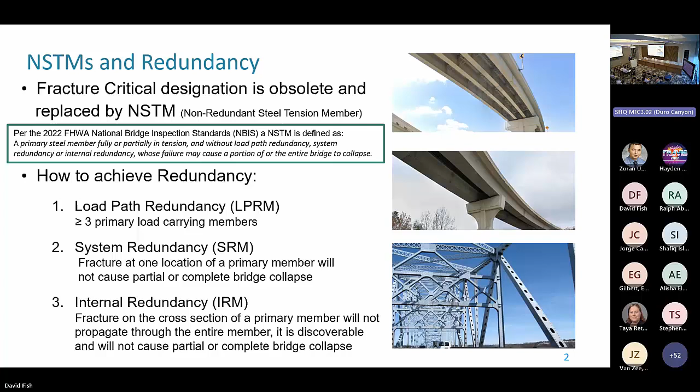So traditionally, we all know what straddle bents are. Normally when we need a steel cap, for whatever reason, they've traditionally been box caps. And they have some good advantages. You can get real long spans with those caps. Inherent to any steel bent cap is you have a very quick closure period to erect that cap if you're over live traffic. Very fast, right? You can probably do it in the night. As opposed to like a cast-in-place post-tension cap, which may have multiple closures for multiple stressings.

And so, steel definitely has that advantage. They're easy to transport and erect, right? They're light. They're easy to be lifted and also trucked across our highways. They have reduced load on their substructure and our foundations, again, because they're light. And the other big advantage that box has is they have the high torsional stiffness, right? And that's something that we like, especially when you have simply supported superstructure framing in.

So some of the disadvantages, of course, are those higher costs because they were classified as NSTMs. They are classified as NSTMs. So they have to be fabricated to much higher quality, much higher tolerances. The fabrication has to be done in a confined space. Some folks already touched on that. You have to get inside that box, preheat and so on. So that just drives up the cost. And because they were classified as fracture critical, there's that 2-year inspection that they have to have. You have to have better Charpy V-notch test requirements, and your fabrication requirements are higher. And that's historically been the biggest disadvantage and why you only use them when you absolutely had to, right?

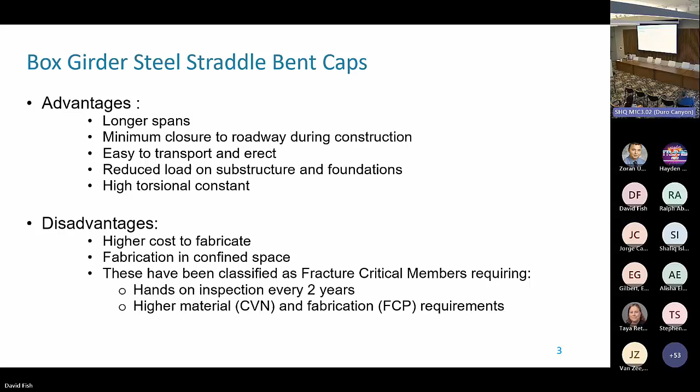So that brings us to the project where we implemented these on. This was for the Loop 1604 I-10 interchange. It's a part of a larger project called the North Expansion Project. Obviously, the owner's TxDOT, and this is a 23-mile long corridor, and it's chopped up into 6 segments. And the interchange between I-10 and 1604 is an existing cloverleaf style, very inefficient for the traffic volume that it's seen. So in segment 2, we replaced that with a full 8-direction DC interchange, modern interchange. It had a very tight design schedule, 12 months.

And so you can see the project team there. So TxDOT's the owner, LJA was the prime, Williams Brothers was the contractor, and the fabricator for these caps was W&W/AFCO.

As we were going through the challenges of the project with TxDOT, one of the things they really wanted us to focus on throughout bridge construction was how to minimize traffic impacts, because it's a very busy area. Right at the interchange, University of Texas San Antonio is right there, Six Flags Fiesta Texas is right there, and they all have access from the frontage roads. Those two institutions have big traffic generation events, like graduation. So they really wanted us to focus on how we could minimize closures on the frontage roads.

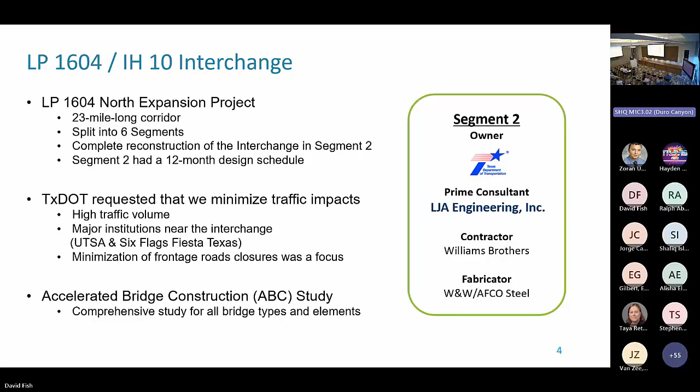So we did a comprehensive ABC study for all the bridge elements, not just the straddle bents, but obviously the straddle bents are what we're going to focus on here. This is a preliminary exhibit we put together to identify every straddle bent on the project and determine if it was a good candidate for some kind of accelerated bridge construction treatment. Some of them didn't make sense — for example, if you didn't have any live traffic underneath it in the interim condition, you could just use a cast-in-place cap there. But we went through the whole thing.

Some we thought would be best for precast, but others were steel. We identified, especially the ones over the nodes at the ends of the frontage road, that steel made a lot of sense given the span lengths and also trying to keep that closure window down. You can see here we had identified 7, and we ended up with 9 steel caps on the job at the end of the day.

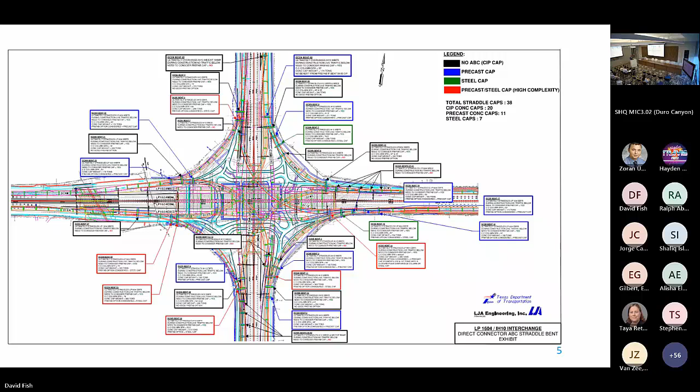By the way, that exhibit was done about 3 months into that 12-month design schedule. So we had no idea we were doing these caps until 25% of our time had burned. That's something I'll talk about — how we had to deal with that limitation through the design.

Once we had identified the steel caps as good candidates, we were aware — and TxDOT was aware — of the cap that's been shown a few times on I-91 in Hartford, Connecticut. Ronnie Medlock and Mike Culmo were a tremendous help to us. We reached out to them, got a lot of information, some plans, lessons learned, and it gave us a tremendous head start. But we had some differences between their caps and ours.

They had a continuous trap box girder unit to support, whereas we had all simply supported concrete girders, TX girders. That meant we had to deal with eccentric loading, where they had their centerline of bearing right at the centerline of the bent cap.

We also had caps at the gores, where there was very limited place to put our columns. As a result, we ended up with some caps that had overhangs, and therefore negative moments in the cap as well.

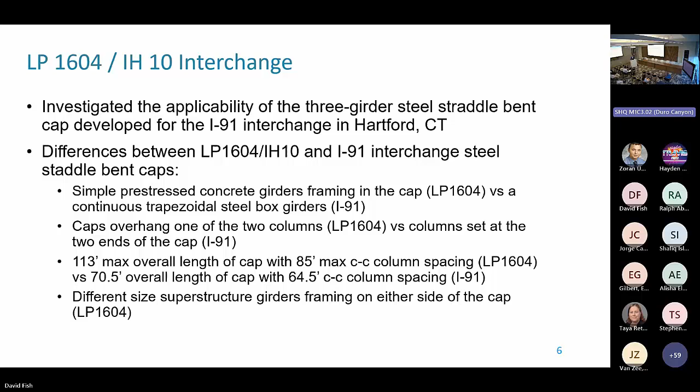We also had a little bit longer caps than they did — our max was 113 feet overall, with an 85-foot center-to-center column spacing. We also had to deal with a couple of instances where the superstructure above was a different height from the forward span to the back span. For example, we had one situation with the TX54 on one side and TX70 on the other, so we had a big vertical difference with the superstructure that we had to deal with.

So we're going to go backwards and build up the cap. The columns were these aesthetic concrete columns. All the steel was A709 Grade 50 weathering steel, which is why you see the drip pans. I know this is something hotly discussed — how many bearings.

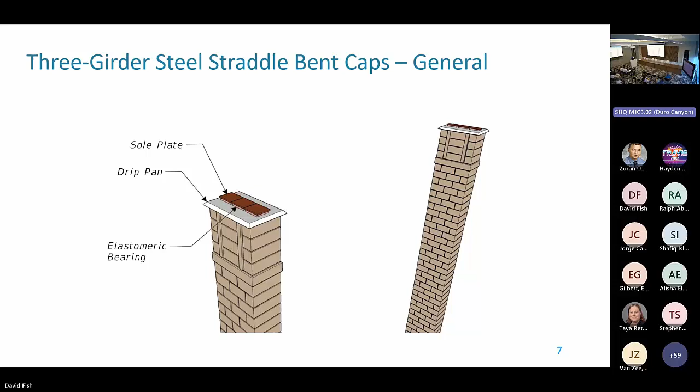We used 3 bearings on ours, one under each girder, and of course they had a sole plate there. Those bearings are modeled right after the TxDOT standard SGEB bearings. I think there was only one case where we had to actually add a couple of layers or something like that, but for the most part we were able to use standard ones. There are our 3 I-girders.

Up on top of the cap, we have different components to help support the superstructure. Where we could, we used what we call masonry plates, named after what you'd use on a pot bearing. You can think of that as a typical TxDOT concrete bearing seat. That's basically how we modeled those plates.

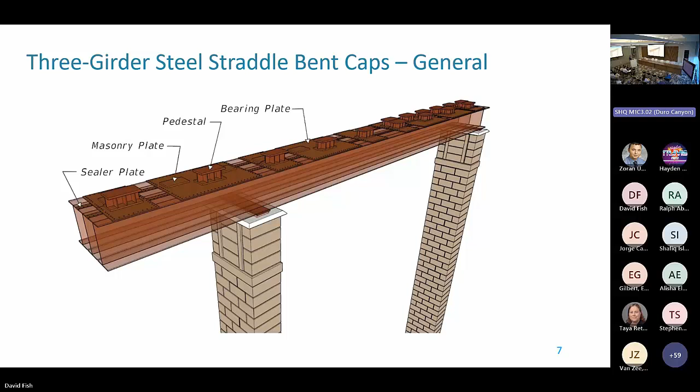Where we had a big vertical difference, we actually built up pedestals, like in the TX70 to TX54 scenario. Underneath those plates or pedestals, we would group them under a bearing plate. Dr. Helwig referred to it as a batten plate in his presentation. Those are there to support the plates and also help seal off the drainage. Where we didn't have any plates, we put sealer plates, non-structural quarter-inch plates, to keep the water out.

Inside we have our stiffeners. The intermediate stiffeners did two things: one, they supported the flanges underneath where we had concentrated loads coming from the superstructure, and they also acted as a support location for the diaphragms. That's a very important part of the design of these caps, which we'll talk about at length shortly. We also had bearing stiffeners, pretty standard there, and jacking stiffeners to help if you need to replace the bearings.

So there are the diaphragms. We didn't have a diaphragm underneath every girder coming from above. Where we had just one single isolated girder, we would have just a transverse stiffener. You can see that they have inspection access built into them.

At the ends, we had cover plates. One end had no door and the other end has two inspection doors. We used FRP grating at the bottom, attached with clips, so there was no drilling into the bottom flanges. We liked FRP because we could get very small hole sizes, I think three-quarter-inch holes, so that'll hopefully keep the majority of birds out of there. You're not going to stop the insects, though.

And then up on top we had our elastomeric bearings for our TX girders. So that's kind of the anatomy of the cap.

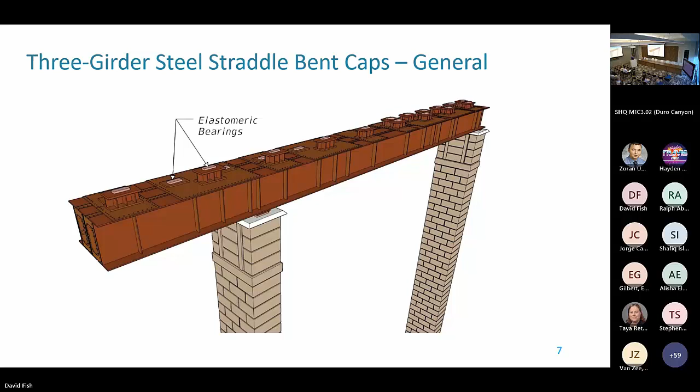So the masonry plates, I'm going to talk about a few of the little details. The typical one was beveled to follow the slope of the cap. Something to remember is that these caps were used in gore areas, which meant that almost every one of them had a cross slope break in the cap somewhere, so we had variable slopes. Where we could, we tried to use stacked plates before we went up to those pedestals.

We could use one plate if the thickness was less than or equal to 4 inches. After that, somewhere between that and maybe 6 or 7 inches, we would use a sandwich, so we'd have one plate that was beveled and then a flat plate on top. We kind of proportioned them to fit a typical TxDOT bearing seat, depending on the angle that's coming in. That's how we figured out that width, along the axis of the cap.

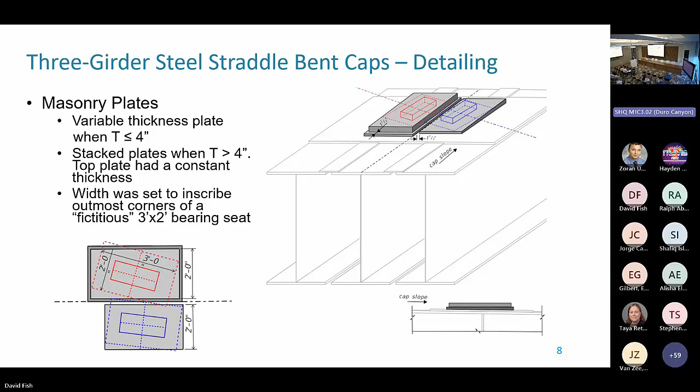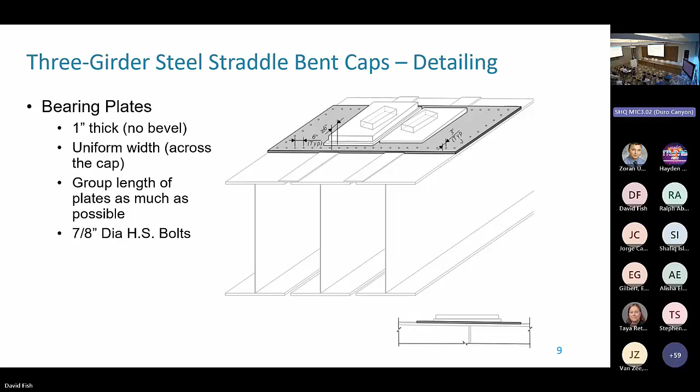Those bearing plates, I get this question a lot. We did not consider the bearing plates for any structural resistance capacity, and there's no bevel on them. They're 1-inch thick, uniform, and we did try to group them as much as we could to get some economy of scale. I don't know if it really did get any, but we tried to group them as much as we could.

Then we had the I-girders themselves. We had 9 bent caps, so if you take one bent by itself, it would have maybe a different web depth or a different flange width, but the 3 girders in each cap were identical. We had no changes of any plate thicknesses throughout each cap. We wanted to keep it simple, remembering that we're dealing with a very short amount of time to design, and we had 9 of them. So we kept it simple.

We did have to set some limits. Really, stuff was driven primarily by inspection access. So we backed out, okay, our minimum flange width is 2 feet 9 inches, and our minimum web depth is 5 foot. We did have some caps that had a web depth of about 8 feet as the deepest. We set some limits, starting points, for each team for their flange thickness and their web thickness.

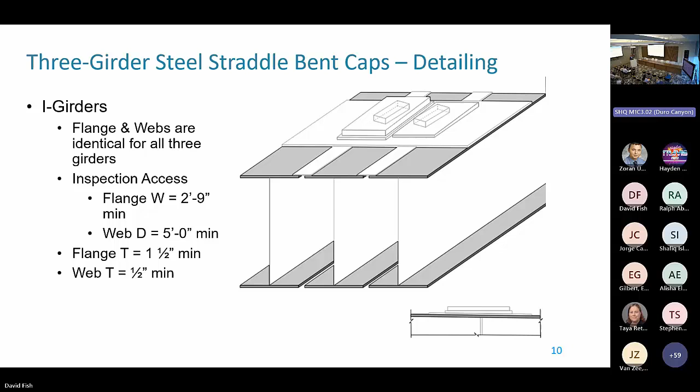So let's talk about the design a little bit.

We kind of started, and we hadn't done one of these before, so we had to start from the ground up and think about how the forces flow through the structure, and then what we need to do to design for them. I'm going to walk you through the process we went through to figure this out.

We start with a very simple model, single beam model, with a point load and a point torsion at each point. That generates a very simple moment, shear and torsion diagram that we can all quickly pick up. So you're going to have a maximum positive moment and a maximum negative moment over that support where we have the overhang.

That's obviously a very simplistic view, but it helps us understand how this thing behaves with the three girders. Next you can see our grillage model, where we actually took three girders and modeled the diaphragms, the transverse elements connecting the girders. They have a real stiffness in this model, right? They're not infinitely rigid.

So what happens then? We see the middle girder, M2 -- the first girder is M1, middle girder is M2 -- has about a third of the moments, close. And I should mention the load in this instance is placed at the center. Later we had to deal with it being eccentric, but right now we're putting it at that center girder, and that's probably what you'd expect: it has about a third of the moment.

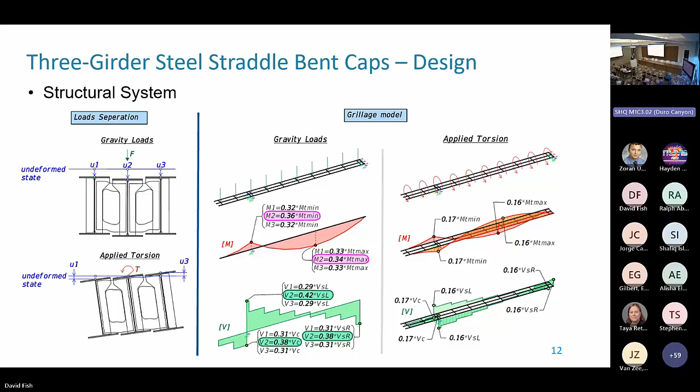So that's an example of what we actually used, where the vertical loads are mostly distributed pretty well, but that middle girder still picks up the most. And if you just isolate the torsion, you can see how that affects the outside girders. The middle girder obviously gets nothing, and those outside girders are equal and opposite.

So we had to decide how we were going to model it. These were the different things we thought about, how we could go about it. Obviously, I think all of us would probably love to do that full brick, 3D FEA model, but there's no way we had time to do that.

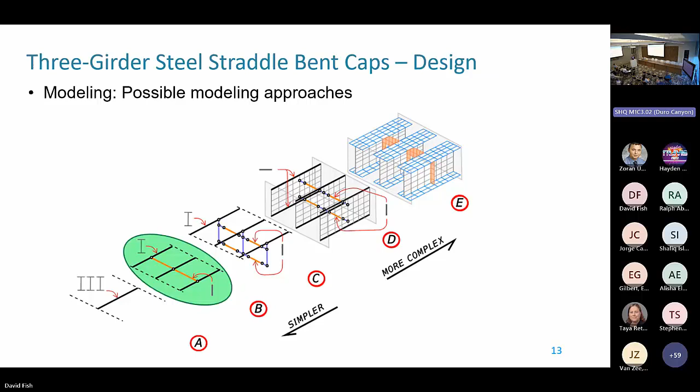So we ended up going with the grillage model. They've been used for a lot of steel structures over the years, especially where there's no curvature. We felt like this was a pretty good approach, but we had to validate how we were going to do this and make sure we were capturing all the effects well enough -- or where we weren't, that we were conservative enough to feel comfortable and get the designs out. So we went with the grillage model, where the diaphragms are modeled as a beam element with a rectangular cross section, basically a plate.

All the modeling we did was in STAAD Pro. We did do a little bit of Midas modeling to kind of confirm things here and there, but pretty much everything was done in STAAD.

Here's an example of what it looked like. We didn't actually have the models with the columns in there. We did just put pins, but this was one that we had. I think we were kind of testing some stuff, and we went with a big, full-blown model there. And you can kind of see what I'm saying, that the girders themselves are modeled with the exact dimensions of the girders. The diaphragm are modeled as a fictitious plate that has the equivalent stiffness of the real diaphragm.

And the girder loads from above came in eccentric to that middle girder, based on the difference between the center line of the girder and the center line of bearing for the two spans coming in. We did have one expansion bearing and one fixed bearing that allowed the cap to expand transversely to the bridge.

And we put that bearing underneath the support that had the most load coming in so we can maximize the normal force, just to make the bearing designs a little bit easier.

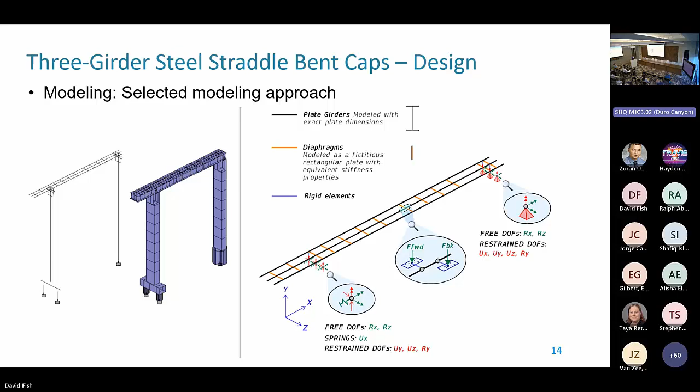So the diaphragms, they're key. They're the key to this whole thing. So we had to figure out how to come up with that stiffness, that equivalent plate. So what we thought is that, hey, this really behaves like a Vierendeel truss or a Vierendeel frame, if you've ever heard that before.

If you're not familiar, it's a frame that carries moment, a truss that carries moment. It's not really a truss, but they're used in trusses a lot. And so that kind of idealized down into something that looks like that.

So what we did is we did one full-blown FEA analysis. We applied a load at the center girder, and we calculate U2, that displacement, that relative displacement.

So then we came back to this Vierendeel model, and we said, okay, we figured out a way to come up with some analytical expressions to calculate U2 based on the actual diaphragm plates that we're putting in there. And we found that our analytical expressions matched very well with the FEA model.

So we felt, okay, hey, this is good. This is close enough, right? So then we still needed to get to that plate thickness.

So once we did that, we came down and we basically modeled this like the diaphragm is a simple span between the two outside girders. And there is a spring, though. They're not fixed. There's not a pin right there. There's actually a rotational spring that's a function of kind of the fixity in that direction.

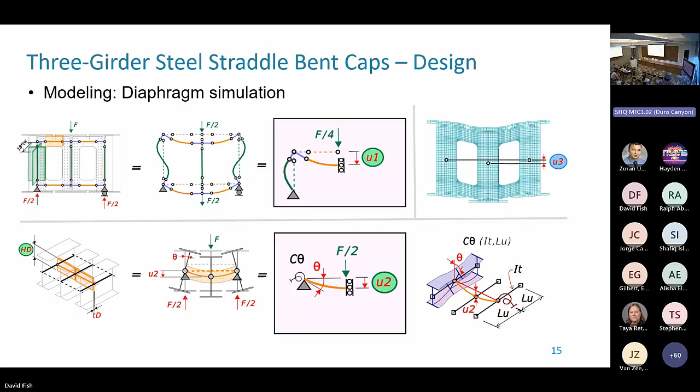So as far as design checks on the main girders, they're relatively, if you've done plate superstructure girder design, very familiar. It's not much more to it. We did, obviously, reduce our bending capacities for some of the lateral bending that's occurring due to the torsion and the outside girders.

They do get a little bit. They all kind of rotate slightly, especially when they're unbalanced. And it's like Dr. Helwig was saying, they're kind of pseudo closed. They're kind of in between a closed and an open section. Again, we did not consider those plates on the top as providing any stiffness, support, nothing. Just the weight, that's all we took from them.

We considered things like flange plate buckling, local bend buckling of the web. As far as shear design, we considered the webs unstiffened. And we also proportioned the web and the flanges based on straight girder limits.

And obviously we had to check for fatigue, and we had to check our welds and everything like that. But those things are really not that much different than what you do in a box cap. The modeling is what we felt was kind of the biggest challenge that we needed to solve.

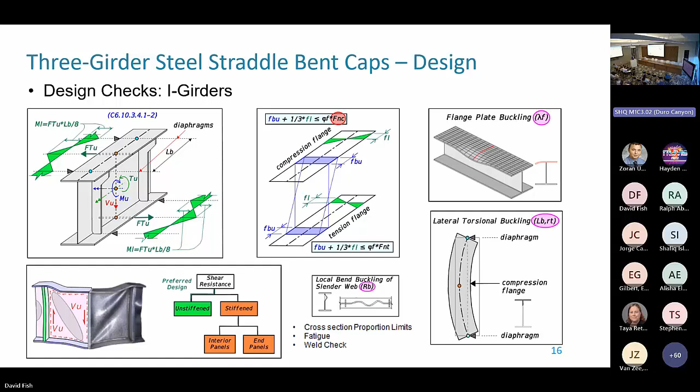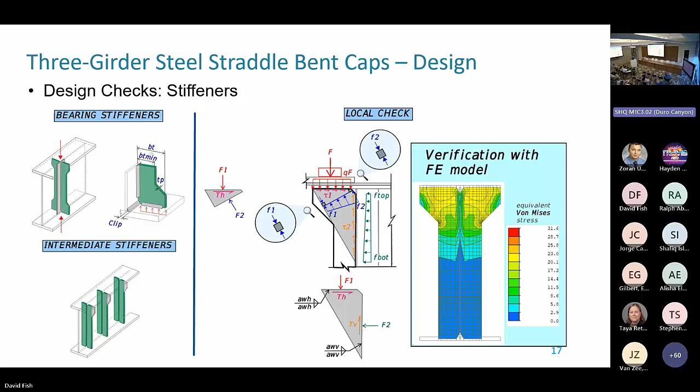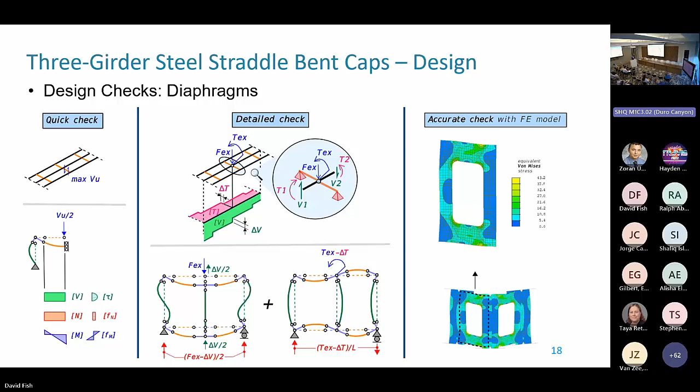That's what we used. Here is one area where we were seeing that in some hot spots we were a little under-predicting what the stress was going to be in those plates. So we backed off quite a bit on the allowable stress, and we really didn't push them very hard at all, because we were on a very compressed time schedule. That's just the reality of a design consultant.

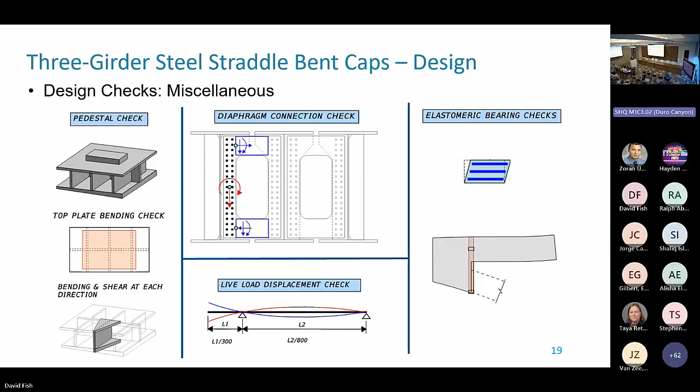Am I doing on time? I'm doing good.

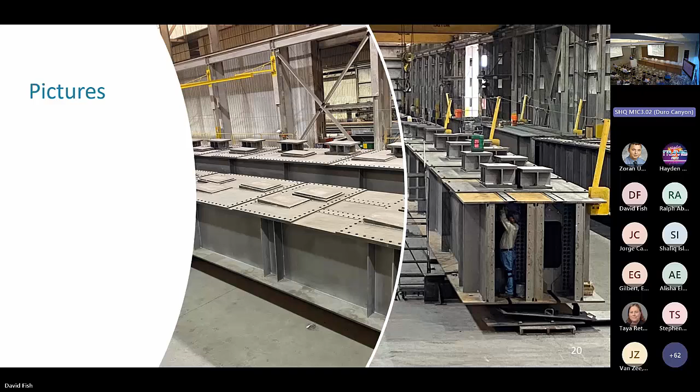I get this question a lot as well - did we paint the insides white? We did not, and that's something to think about. But going back to what Jason Lloyd said, we're not very good at finding those cracks, and these are redundant members, so if there is a large crack we'd be able to find it. That's why we didn't paint them white.

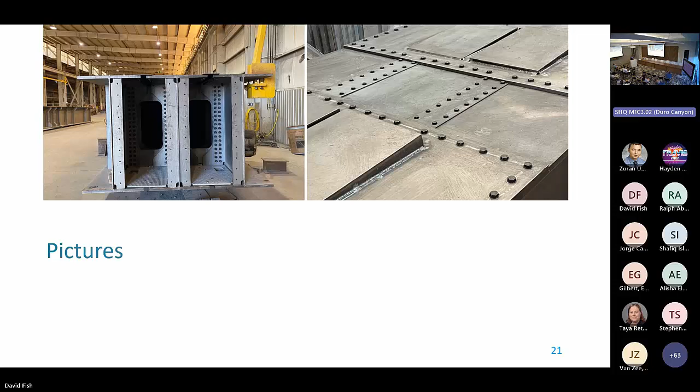One thing I noticed seeing them out in the field is that they were shipped with all three girders bolted up together, but for whatever reason they didn't ship them with the bearing plates or the sealer plates. Those came on a truck separately and were put together in the field. You can see the FRP grating down there with those clips, so there's no drilling in those flanges.

One of the things we were worried about is aesthetics and how this thing would look. We had done some early 3D modeling like what you saw on those previous slides, but I think they came out great. Seeing them in person, it's hard to tell that they're not a box, especially when they're up in the air - you can't tell how much those flanges are sticking out as well as I thought we would. So I think aesthetically they look pretty good.

So we're on hold for the next one, or wait for the questions? Okay. All right, thank you.